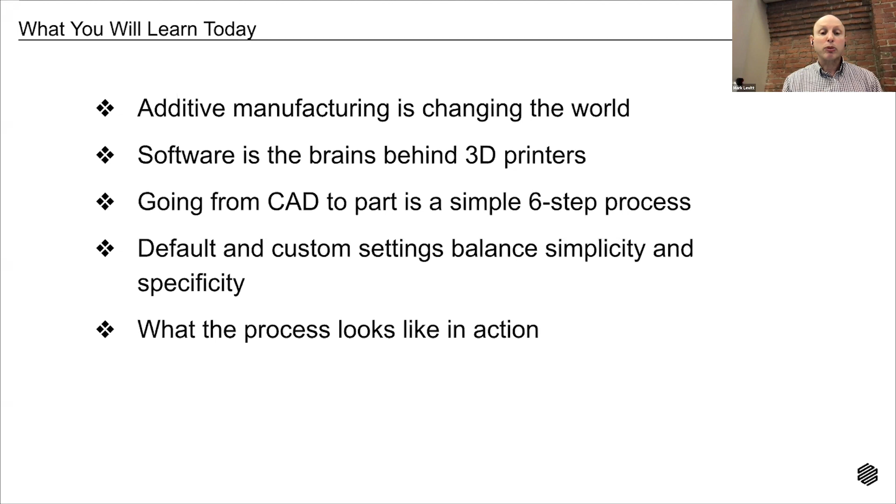In today's webinar, you will learn that additive manufacturing is changing the world. Software is the brains behind 3D printers. Going from CAD to part is a simple 6-step process. Default and custom settings balance simplicity and specificity, and what the process actually looks like in action. We have 3 members of the Markforged team here today to take you from art to part with Eiger.

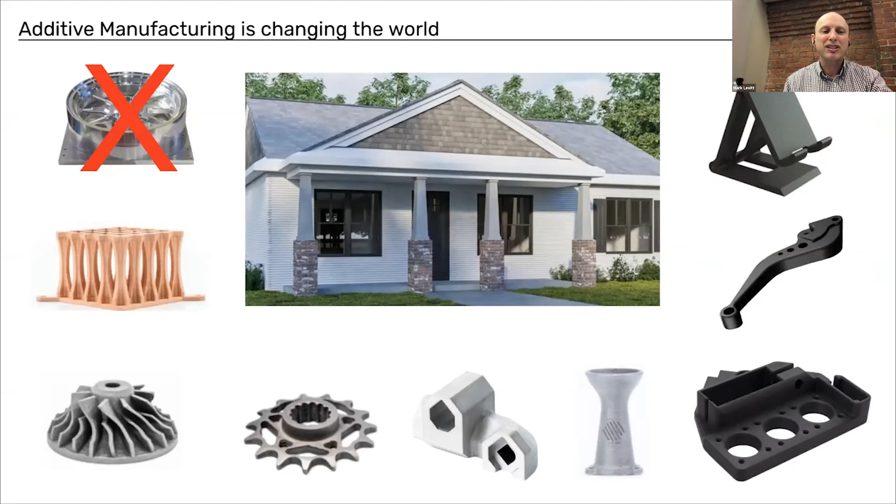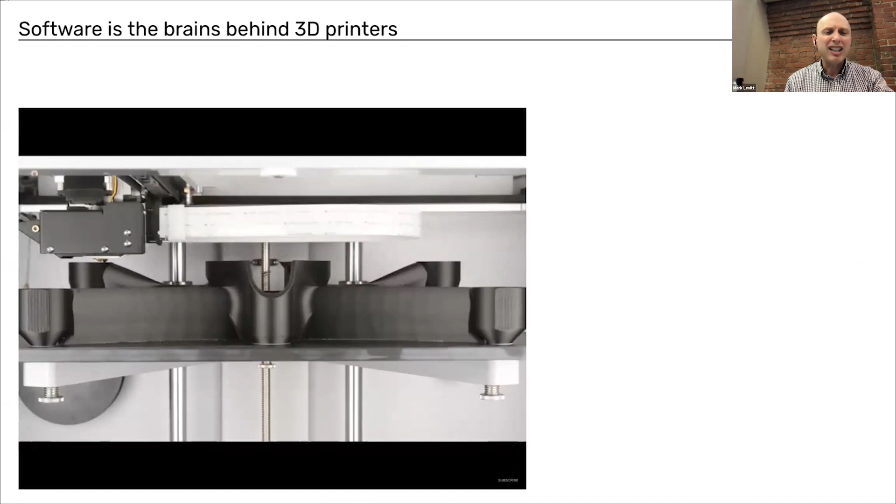Here's a time-lapse video of what 3D printing looks like for a drone unibody. The printer knows nothing about drones. It needs to be told what and how to print the part. Software is what we use to tell the printer everything it needs to know, including what part to print, how to print the part layer by layer, what materials to use, where to add supports if they're needed, what type of infill design to use if the part isn't being printed solid, where to add reinforcement if needed, what surface finish is needed, and how many parts to print at the same time.

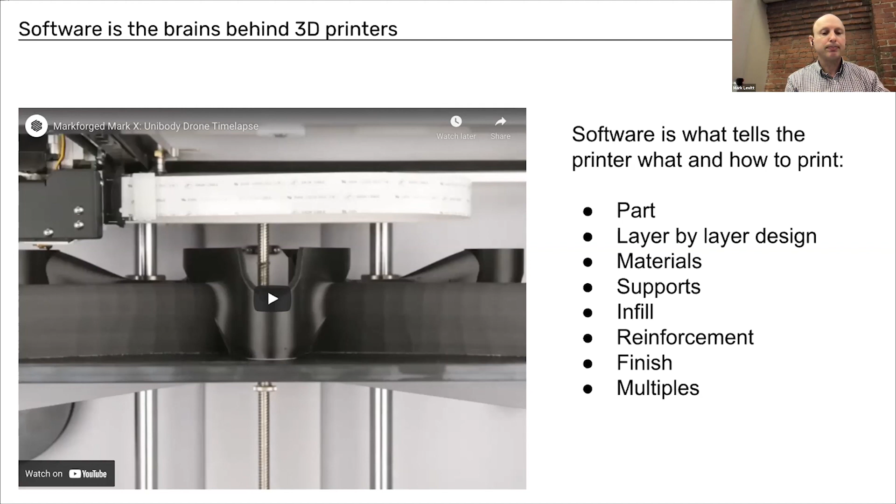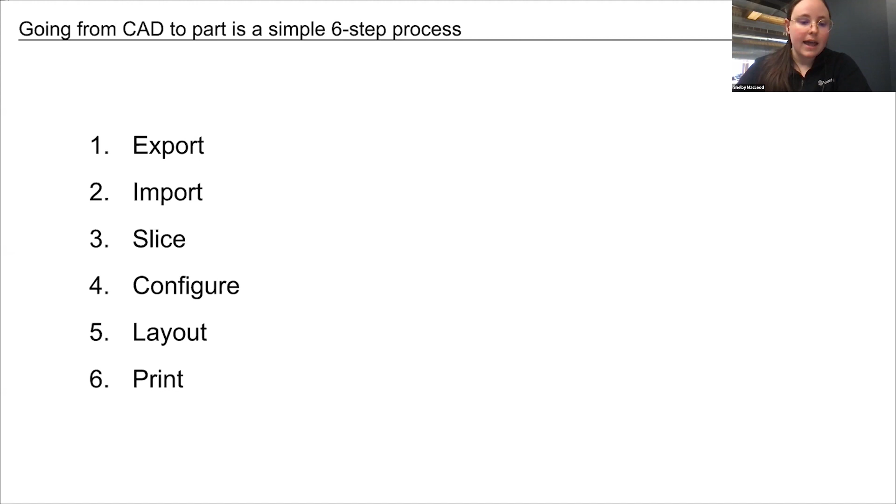Once you have a design for your part, going from CAD software to 3D printed part is a simple 6-step process. So first you export your part from your CAD software, then import it into Eiger, the Markforged software. Then you will slice it. So that is done again in Eiger, figuring out those paths layer by layer. Then you can configure any settings that you might want to change, and then lay out your parts on the print bed if you're creating multiple, and then print.

And how much time and effort you need to put into each of these steps will depend on what you decide about those settings. So if you decide to go with default settings, which are based off of what works for most parts, the 6-step process can be completed really quickly and easily in just a minute or two. If, based on the specific part you're printing, you decide that you need to customize the settings, then some of the steps will take some time, but may produce a better result for that specific part.

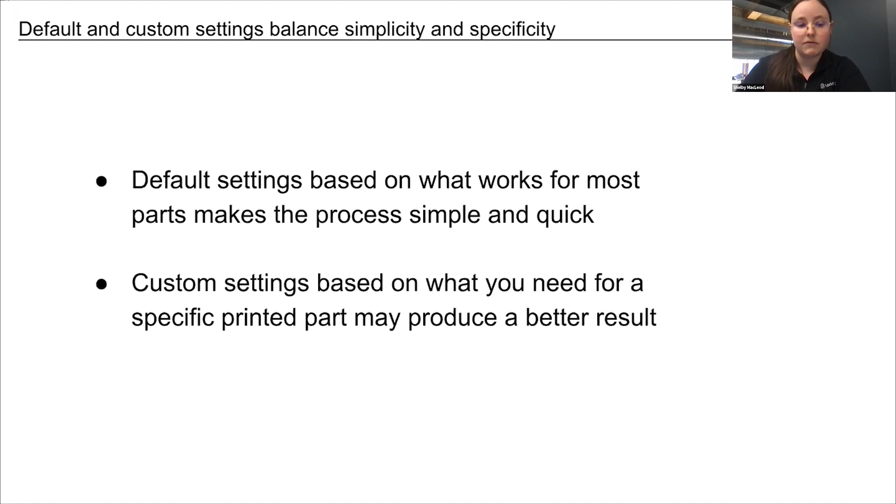Awesome. Thanks so much for that. Let's go ahead into the demonstration now of Eiger. Let me go ahead and share my screen here. Great. So what we're going to do today is take a look at exactly what Shelby just talked about, and that is how do we go from importing a part to slicing a part to printing a part with the Eiger software. Right now, what we're looking at is the library view of the software.

And in order to... Mark, if you could take back over again and show that picture of the demo part. I totally forgot. We need that demo part shown up here just so everyone has an idea of what we're talking about today. Sure, no problem.

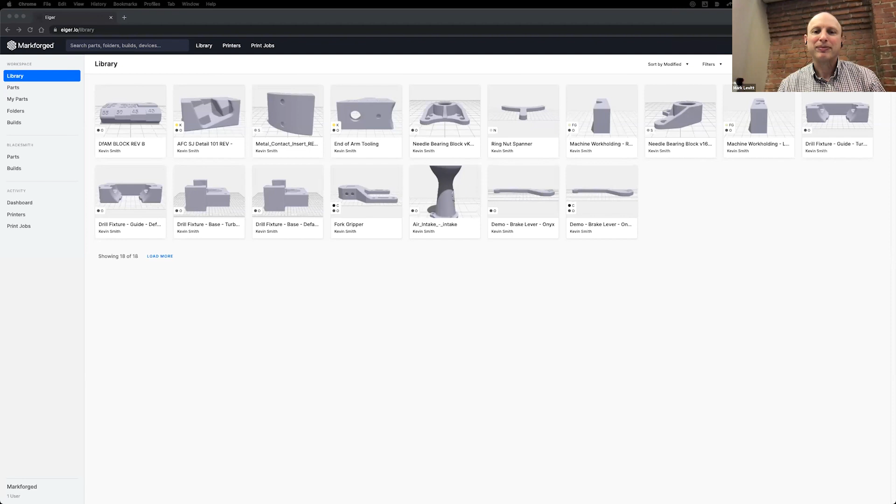Perfect. Thank you. I missed one step. Sorry about that.

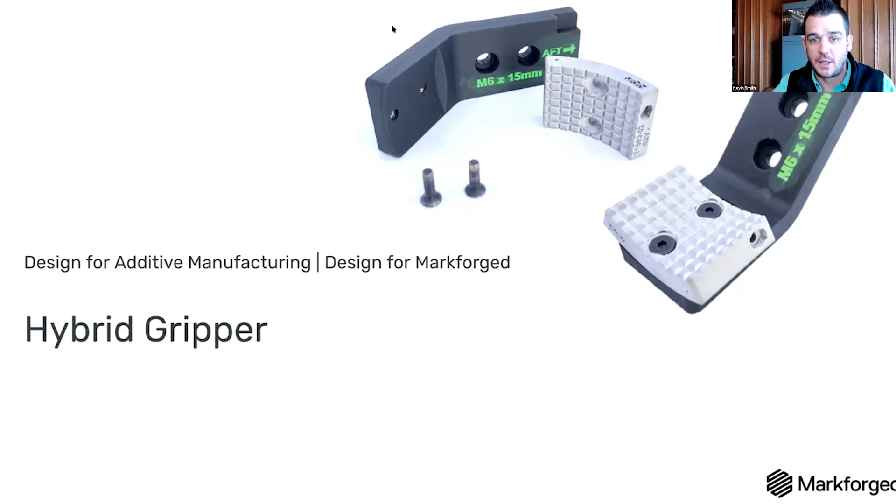And then it also needs to withstand some heat because the part that it's picking up is going to be hot, around 200 degrees Celsius. So as we move from one operation to the next, we want to make sure we have some heat resistance, another reason why you might want to put a metal piece at the end of your robot gripper. But we'll talk more about the robot gripper and some other functionality as we go through the demonstration. Let's head back over into Eiger. I'll share my screen again here.

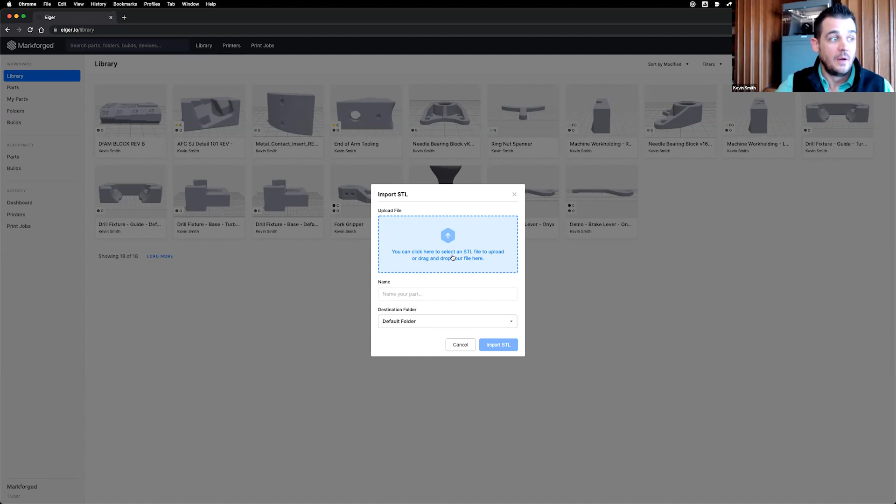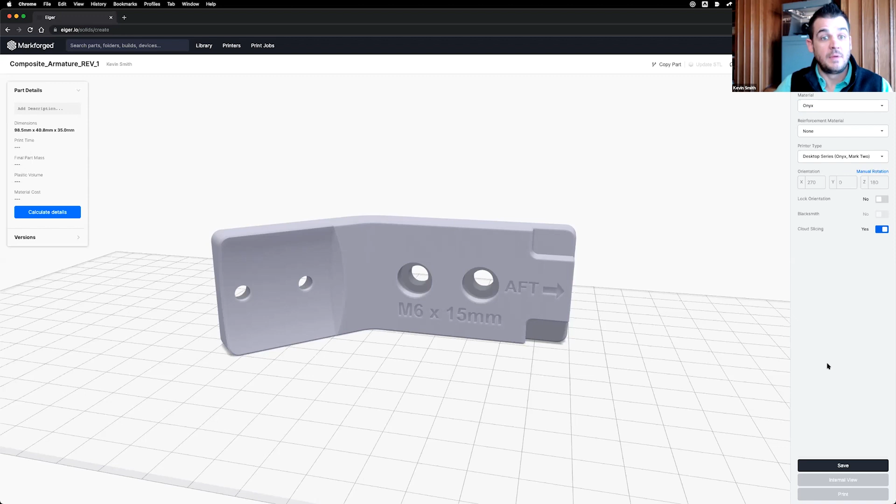Great. So I would like to say that Eiger could be as simple as 3 steps, and I think I can prove it out right now. Granted, we've saved out our STL file from our CAD software already. What we do is just go to import STL. We pick our part. We import it. Now, the one thing you might need to do here is set up the part so that it's on the build plate the way that you want it to print. Orientation matters in a lot of cases. We'll talk about this more in a moment. But bring in the part and then use the default settings. Don't touch anything. And we'll go ahead and hit save.

What's happening now is Eiger is sending information to the cloud. Eiger is a cloud-based software, but it still has a ton of security. We're ISO 27001 certified. Go to markforged.com or type in Markforged plus security, and you'll find a ton of information on how secure Markforged's platform really is.

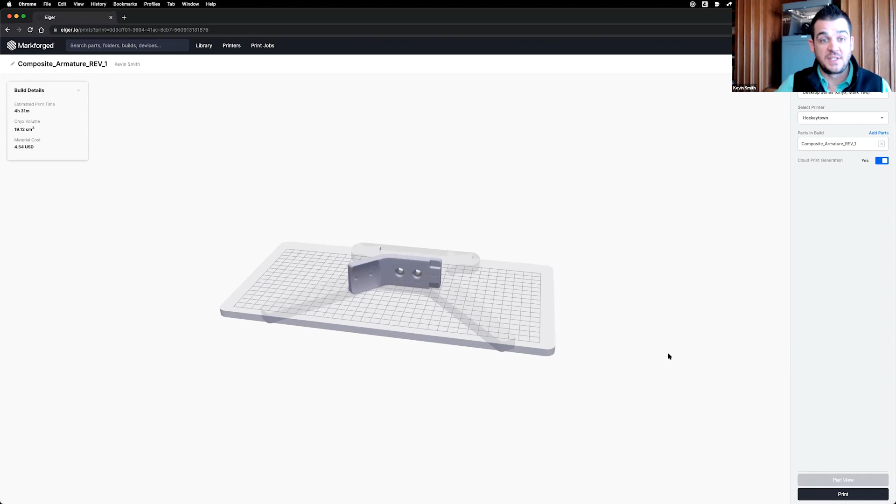Next, after we hit save, like Mark was saying earlier, it does all the tool pathing for the 3D printer, and we can directly go right into print. This is where Shelby was talking about putting the part on the print bed. We can actually see the part on the print bed. We can zoom out and get some great perspective on how big this part is and what it looks like on our actual 3D printer. And then we hit print. So I think that's 3 steps, but we could also make it more user configurable if we want to.

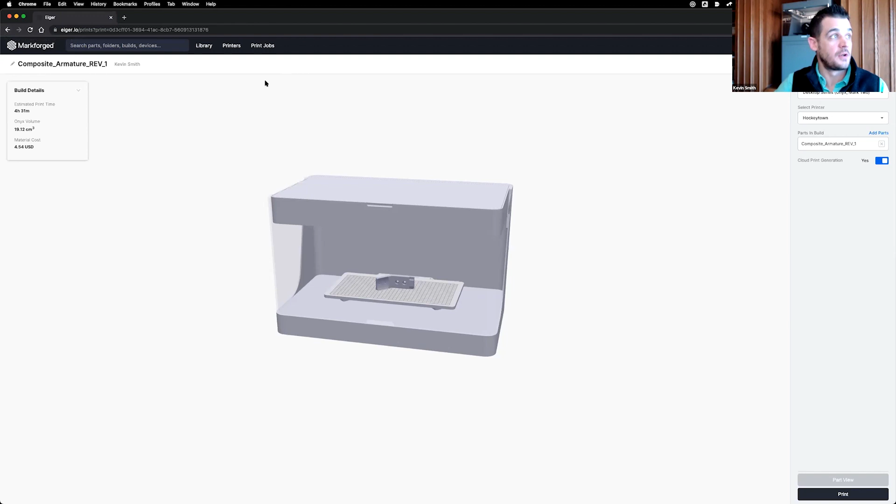So let's go back in time. We can either hit the back button on our browser because Eiger is a browser software. We run this from Google Chrome. You can backspace through everything that we just did there. It won't undo anything, so it's going to save your settings for this part. Or we can just go right back into library by clicking this button up here.

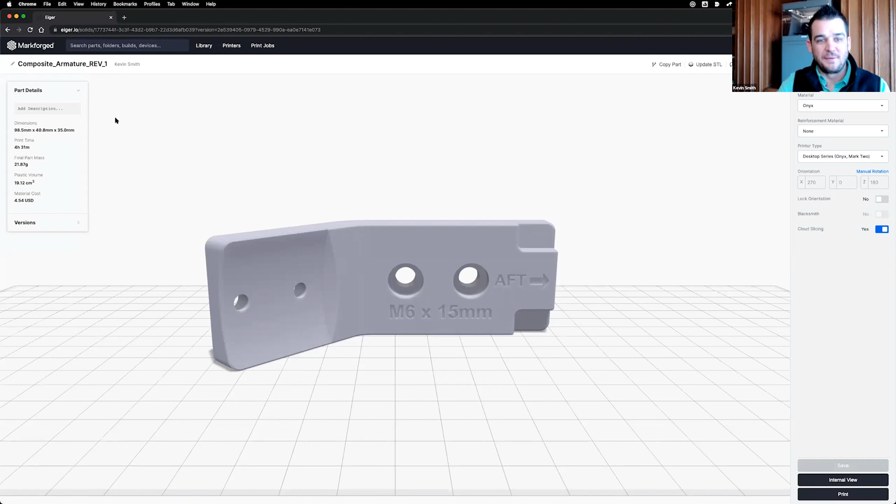Finding your part in your library. By the way, the library has different sections to it. We could create more folders and add parts to specific folders. Right now, we just have this set up as a basic default account to keep things simple. But we'll go back into that part, click on it, open it up. Everything is the way that it was before. Nothing's changed. But we might want to make some adjustments to this, so let's talk about that in a second.

But first, let's take a look at the left side of Eiger here. There is a part details window, and it's going to give you information like the size of the part, the time that it takes to print the part with your current settings, and then the part mass. Another thing to think about is the plastic volume. How much material are we actually going to use to print this part?

And then what is that going to end up costing us? If you want to do this right now, you can go to eiger.io and you can set up your own account and bring some of your own STL files into Eiger and start mathing things out. Like, what is it going to cost me to print this part? And figure that out right now if you wanted to.

So next, we'll go to the settings. Like we said, we can get more intricate with exactly how we're going to print this by using the settings that we have here. Let's take a look at the part settings tab over here on the right. Real basic here. We're going to keep it real simple. We have our material drop-down menu. This is where we can choose which material we're going to print with. We also have reinforcement material.

Markforged has a unique capability where we are able to add in fiber reinforcement to our parts. This is a secondary process, a secondary printed material that goes into the part. Carbon fiber, Kevlar, fiberglass. These will make your part super strong and keep it lightweight. So in this application today, we're talking about carbon fiber. Carbon fiber is a great reinforcement material to use when we're looking to replace aluminum or other metal parts with our 3D printed Onyx, our base material, and carbon fiber. So keep that in mind.

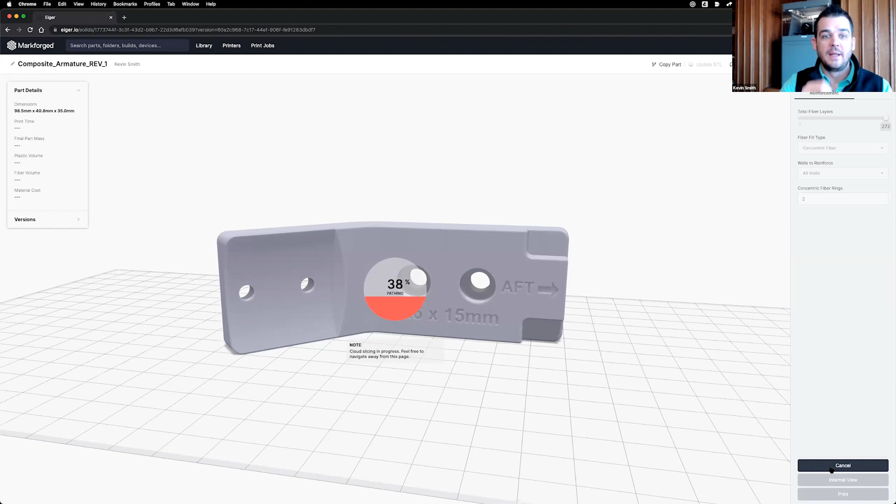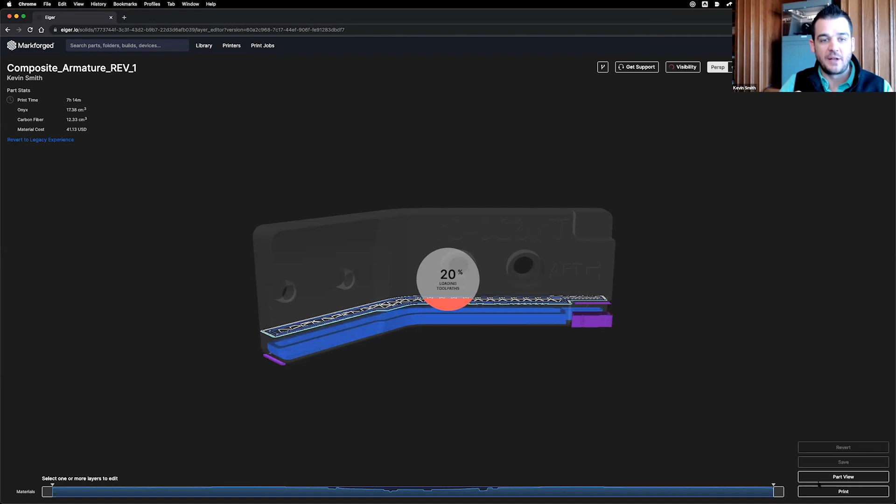Remember, we're adding in carbon fiber to give it the strength of aluminum, and we're going to go through the slicing process again. Once again, what's happening in the background here is the Markforged Eiger software is tool pathing the movement of the machine, where the material is going to get laid down. And now we're going to have some carbon fiber. Where do we see this? The internal view. The internal view is like an X-ray into the part. It shows us the internal process that's happening on the machine, how we build this part up.

We can see our supports. We can see our internal triangular infill or solid infill. Keep in mind, with 3D printing, we can lightweight things. It's not like a plastic injection mold. When you inject the material, it fills up the entire mold and you have a solid part. We can print solid if we want to, but we can also go with the triangular infill, which will lightweight the part further. So what we're seeing on screen right now is a lot of blue. That's the carbon fiber. That's the color we've chosen for carbon fiber with the Markforged Eiger software, and purple, the supports.

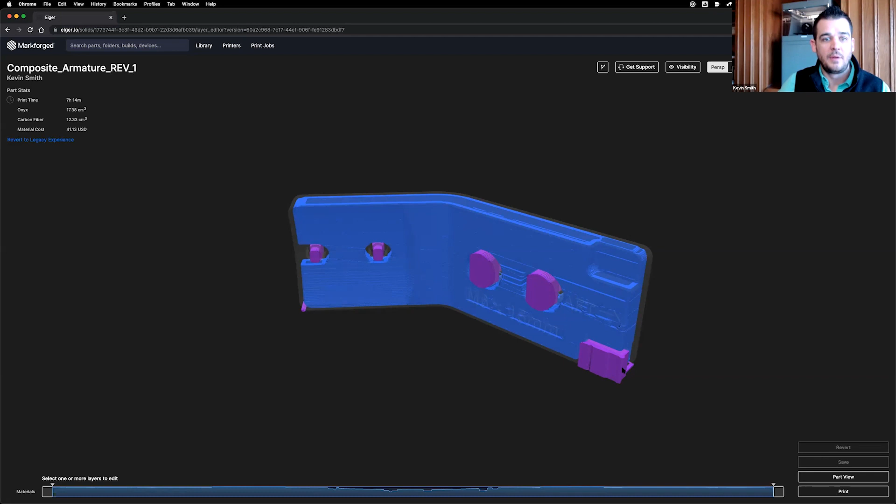We can go through and take a look at this in the 2D view, once again, in an X-ray view, see exactly what's happening on each layer, and just verify things are gonna work the way that we want them to work. We have the fiber in the right place. And we could literally go through and change every single layer of fiber if we wanted to by using these options up here on the right.

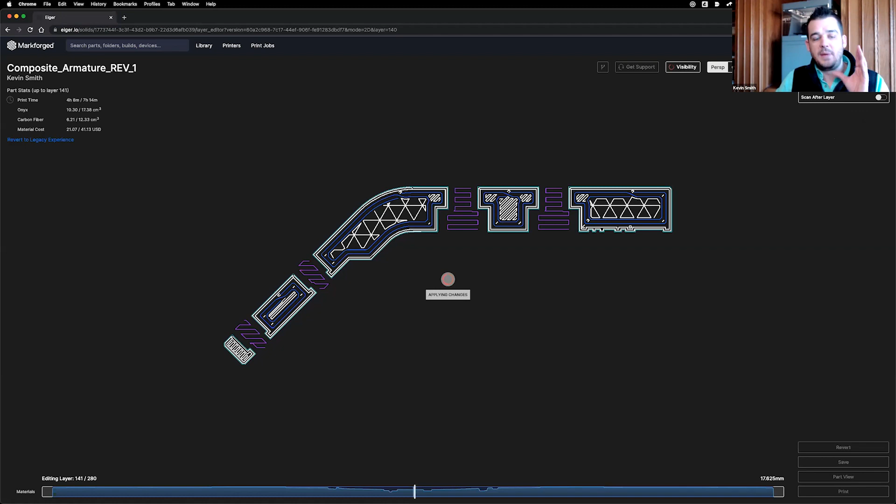I'm not gonna get into that right now because this is a whole separate subject and we have Markforged University for that. If you want to understand a little bit more about what fibers to use, when to use them, and how to use them, take a look at Markforged University.

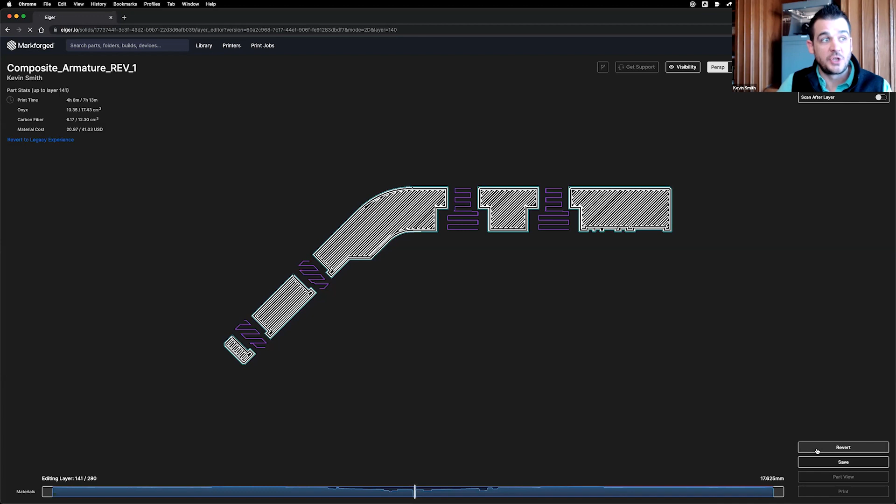It will give you some great tips on that and a great learning experience as well. So I'm going to go ahead and revert the changes I just made here. I'm not going to save those changes. And then we're going to go into the build view. Once again, click print, takes us to the build view, and we've got our part in our 3D printer ready to go.

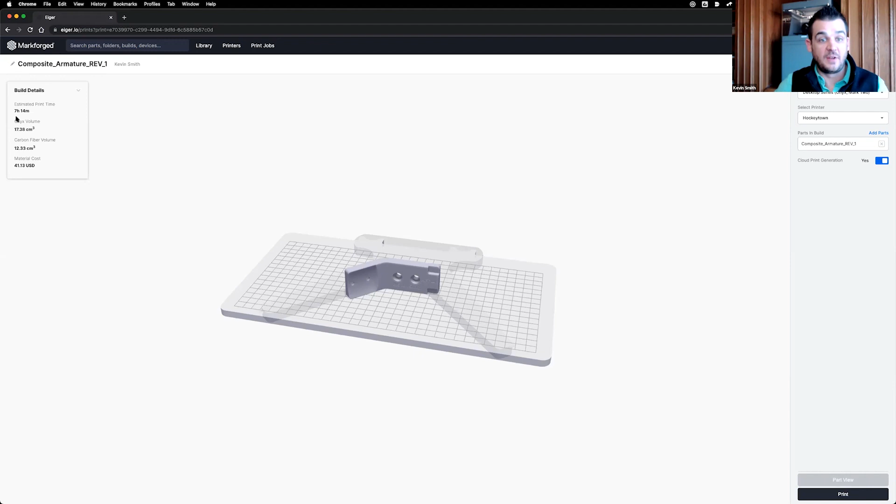On the upper left side here, this is the build details. Why does it look kind of the same as the beginning, but a little different? It's because this is what we call a build in Eiger. We can add in more parts. So if I wanted to make 3 gripper fingers, most of the time, your robotic end of arm tooling is not just 1 finger. You might need 2, you might need 3.

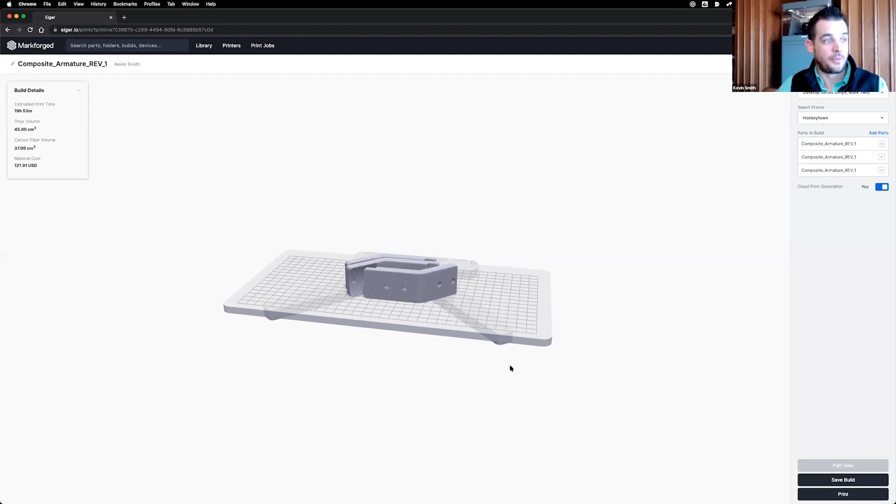We can go ahead and add in more parts using the add parts option over here on the right. Now we've got 3. Notice they automatically nested on here, so they're in the perfect position to hit print. We can go ahead and hit print now. It's going to take you to your option to print, and it's going to tell you, hey, this is the plastic volume, this is the fiber volume, this is how long it's going to take to print this. Do you want to print it now, or do you want to send it to your print queue?

So that's composites. We started with just a simple 3-step process, boom, boom, boom, or we got way more intricate by adding in carbon fiber, seeing how it's routed in the part. We could have changed some things there, and then we added multiple parts to our build plate. So we've changed some things with that last example there.

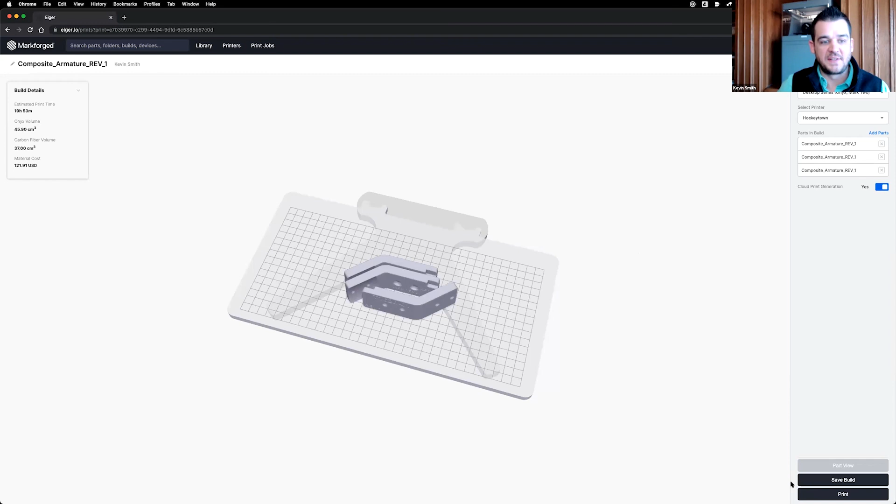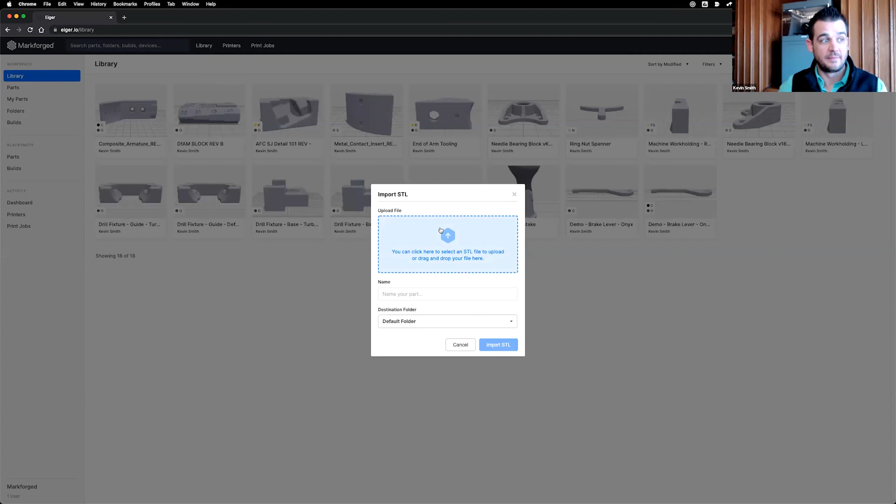What I'd like to do is go through one more example with you. Let's take a look at the little gripper piece of this end of arm tooling, which is that metal piece. Let's take a look at this whole process one more time. Import STL. We're going to select our metal contact piece. Import that into Eiger. This is where we're going to set up how we want to print the part.

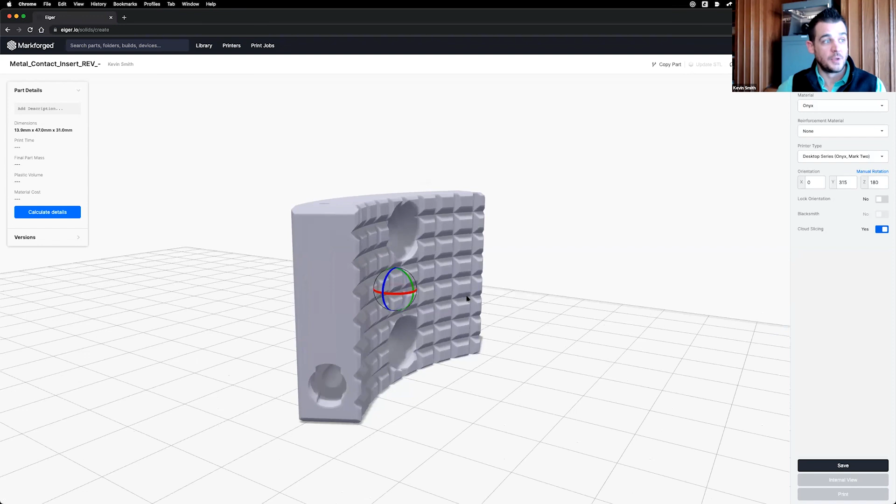We're going to select this bottom face right here. We could use the manual rotation option to rotate this around, however we want to rotate it. Then remember, we're working with metal now. What's going to change? Our material type. So we'll go up here to the material drop down and we'll select 17-4 stainless steel. You can see all the other options of materials that we have here too.

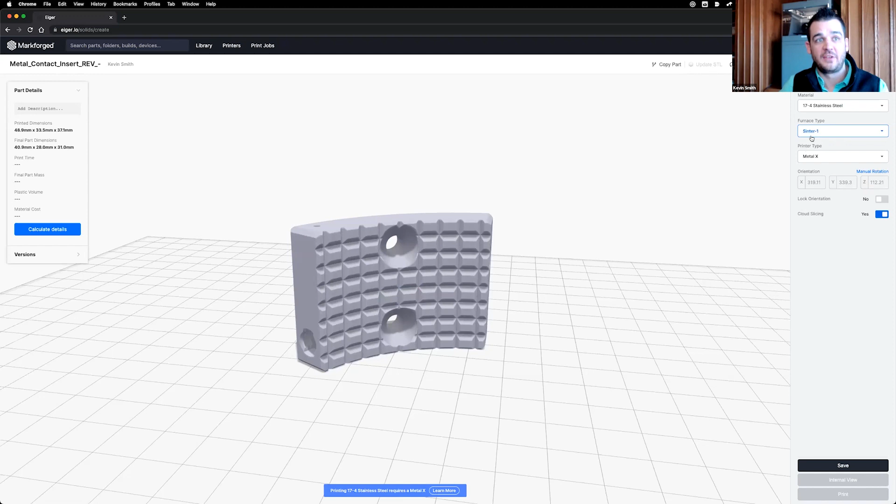17-4, it automatically chooses a furnace and a printer type based on the material that we chose. The Metal X system is a 3-part system: printer, wash, sinter. Something to look into if you're interested in printing metal. We won't get into all the details of that right now.

Notice we're also getting some messages down here at the bottom of the screen, and you'll see this too if you load up an Eiger instance and try to run through some metal parts. It's just letting you know that, hey, you don't have a Metal X system in your organization, which I'll show you our organization here in a second. But if you did, you would have that option to print with.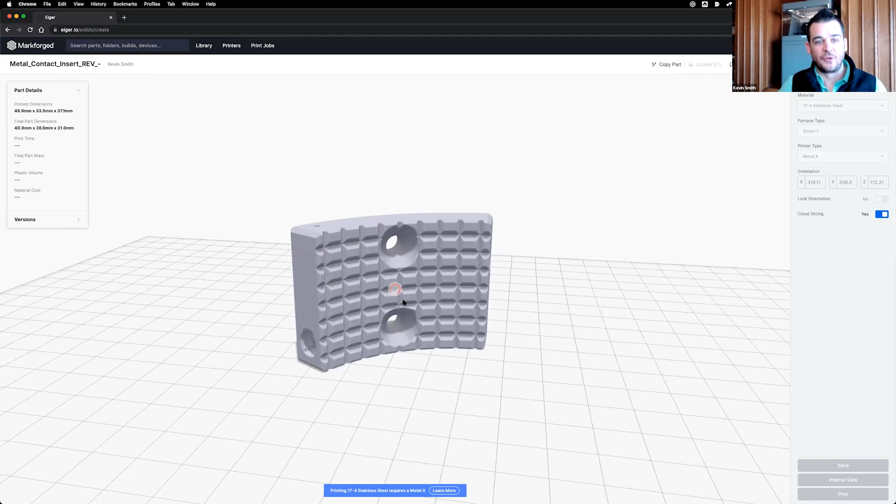We'll go ahead and just run through the calculation of this part with our default settings. And we'll take a look at the part details. They're going to look a little different this time because now we're looking at a metal part versus a composite part.

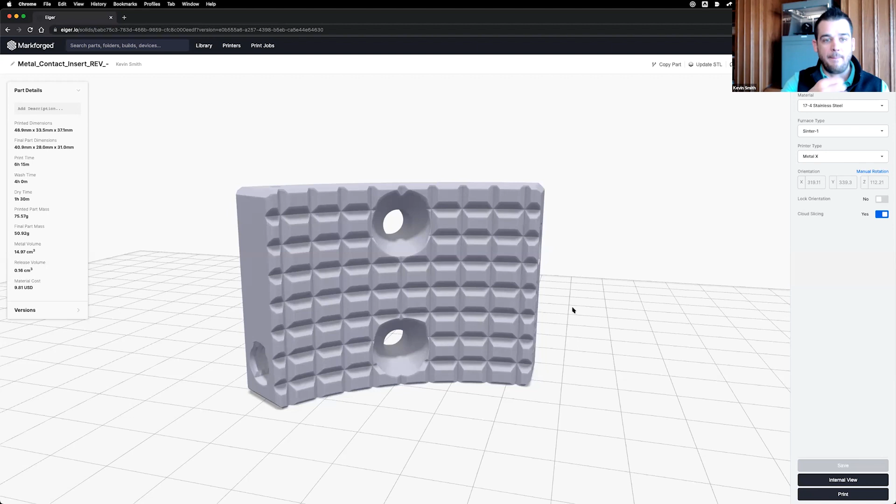I did want to talk about something else when we look at this part, and that is this pattern on this piece. It's a knurling pattern that was designed in. The nice thing about 3D printing is complexity is free. It may take a little more design time, but think about CNC machining this part. It's going to be a lot different of a beast, right? A bigger animal to handle printing all these in here.

You might have to use a V-bit tool to get it in this curved shape in the first place. You're going to have to remove a lot of stock from the CNC machine. We also have some internal channels in this piece too. So 3D printing allows you to add complexity to your part without any added cost.

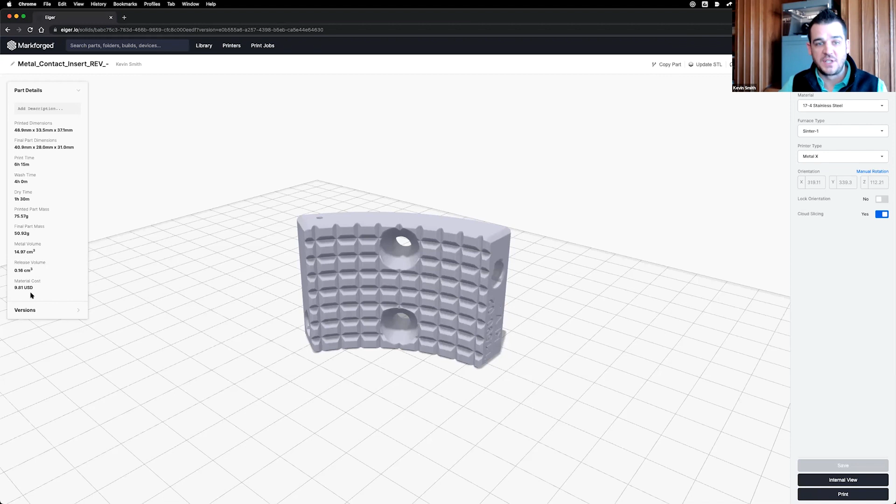Let's move over to the part details. It gives us the print time, wash time, dry time. Once again, this is a 3-part process. We print, wash, sinter. And then we also have our metal volume and how much it's going to cost to produce this using the 17-4 stainless steel material.

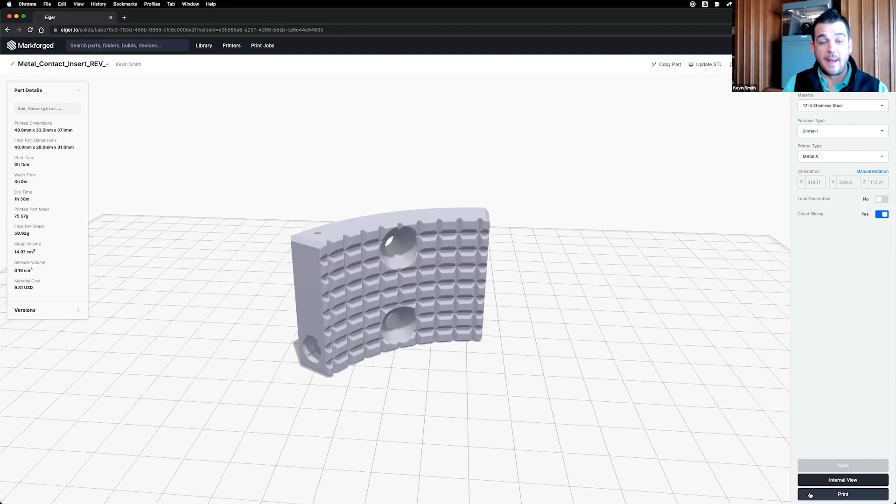Next, let's go to that print view one more time. Remember, this is the build view within the Eiger software. It's going to show us our MetalX build plate. And if we zoom out, we can get a perspective where we can see the actual entire MetalX system on screen. And over up here on the right corner is where we can see our printer type.

You can see MetalX is grayed out right now because we don't have a MetalX within this organization for this demo of Eiger. But we have our estimated print time, stainless steel volume of material, and then the material cost. And if we wanted to, we could add in more parts here, and we could print 3 of these if we needed to, just like we were with the composite parts.

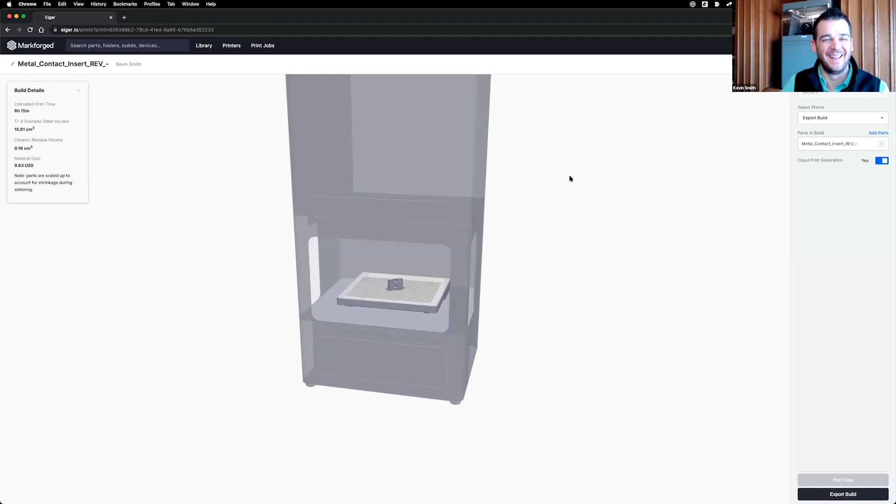Or we could export the build too. If we wanted to send it to somebody that we knew had a MetalX system, we could do that. Yeah, so like Mark said, any questions so far? I know we've covered a lot right now. Yeah, we can go further here, or we can answer some questions.

And I know that one common question is, the cloud is great, and for some of our parts, we can use the cloud. What if I need to work completely offline? Is that an option? And in fact, I would say a minority of our customers do use our offline Eiger software, which is 100% offline, which does not require any internet connection from the computers or the users that are accessing the part storage, the slicing, and the printing.

And they can directly print via USB or using our LAN connector capability to connected printers on their private local area network. So we definitely have an offline capability. Most of our customers see the power of the cloud to be able to be connecting to any of their printers anywhere in the world, wirelessly, over the internet.

And the system that we have is a self-learning system with over-the-air updates, which is informed by anonymous data that we can gather in the cloud to make sure that prints are successful, and we can tweak and adjust things. And we've been doing that for over 8 years now.

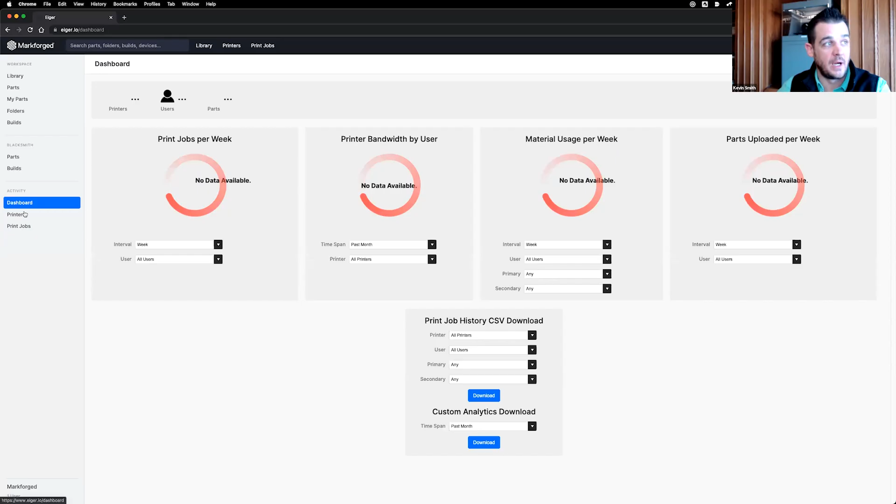The nice thing about the dashboard is it's going to give you insight into what your users are doing within your organization, how much material they're printing, how many printers you have, which ones are up, which ones are down. These are the kind of things that are in the free version of Eiger that you can access from the cloud right now. So very intelligent.

The other thing is too, once again, it's cloud-based, it's internet-based. So you want to kick off a print from your house, great. You want to kick off a print on a printer that's across the globe, go for it. You've got those options there. So, as far as the way that Eiger works, it's a management software as well. And like Mark was saying, we can build on this.

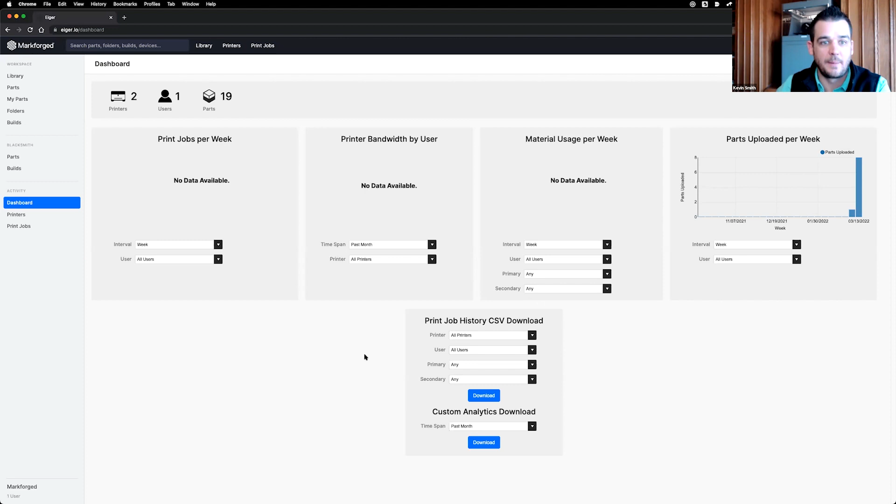We have the way to scale up Eiger to more of a global fleet management system. And the dashboards is one piece of this, but it gets bigger as you grow as an organization. So 3D printing can become a very powerful tool for you globally.

I see a question in the Q&A here asking how you would obtain the material. Is it supplied by Markforged? So I can say yes. We produce all of our materials and build our software and our printers. And so something that's really great about that ecosystem is when you're buying Markforged, you're not buying just a printer, you're buying the whole digital forge, which includes all three of those things.

And that's actually part of what makes us be able to have such an easy, seamless process in Eiger that Kevin just demoed for us, because we have control over our printers, we have control over the materials. We can make those settings so that you don't have to fiddle with a bunch of different settings. We know what's going to print best on our printers. And so we just give you control where it's most meaningful to you, and we take care of the rest to make sure you get great quality prints.

And we are continuously releasing new materials. So just this week, we released what we call Precise PLA in multicolors. Most of our prints have historically been in black with Onyx as the base nylon material. We've had a nylon white as well, but it's been primarily black for industrial commercial purposes. But we have introduced Precise PLA in lots of different colors for prototyping and other uses.

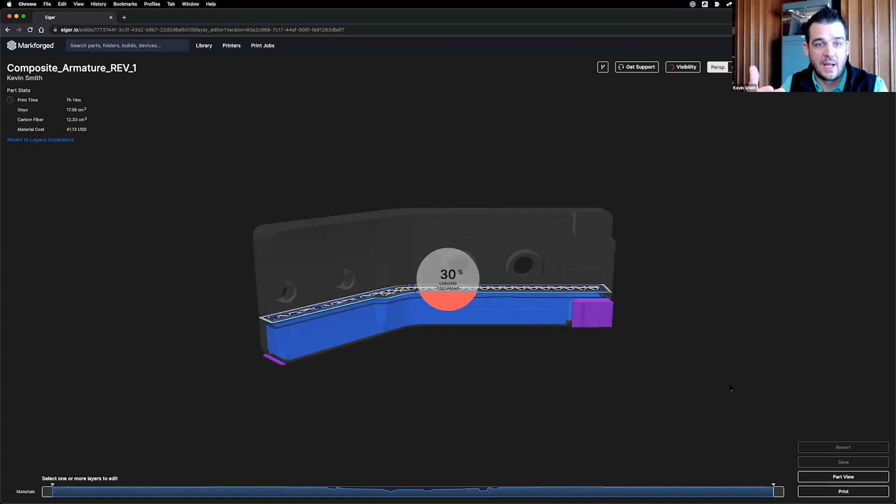One question also has come up, Kevin, is can you pause a print for various reasons to bring in some tweaks? I know some people like to insert magnets or something in the inside of the print. Can you describe that process? Yeah, absolutely. So we would go into our internal view of our part, and we have some options in there where we can add in pauses for inserting hardware like magnets or maybe nuts that will be an attachment point for an assembly of parts.

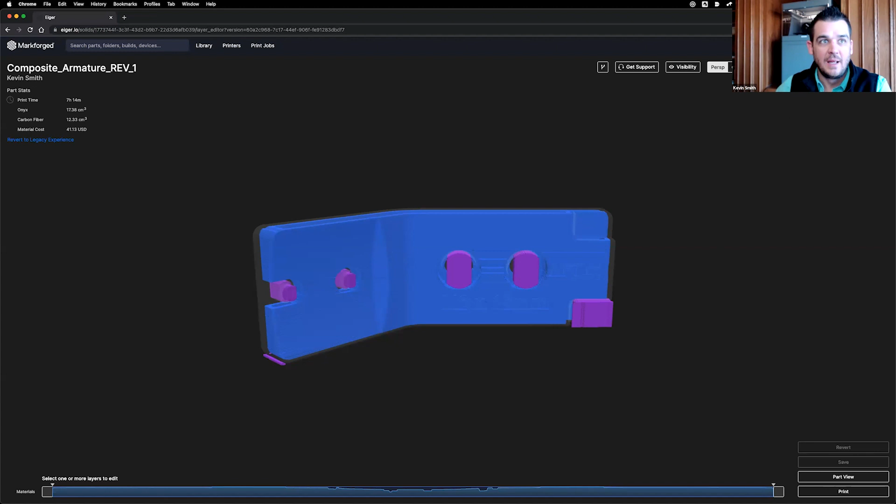I like to give just a little bit of information at a time, because 3D printing really is a big animal. It takes on a whole new, creative mindset when you get into 3D printing. But yeah, a lot of our customers are doing some pretty intricate stuff with this. So if I wanted to add in a pause, I could select any layer in the internal view here and just choose this option, pause after a layer.

And what's going to happen is it will pause the machine. And whenever something happens on the Markforged equipment, it's going to send you an email notifying you that your print is paused. And then you can walk over there, drop in your nut or drop in your magnet, whatever it is that you're placing into the part there. Yeah, that's how you would do that, Mark.

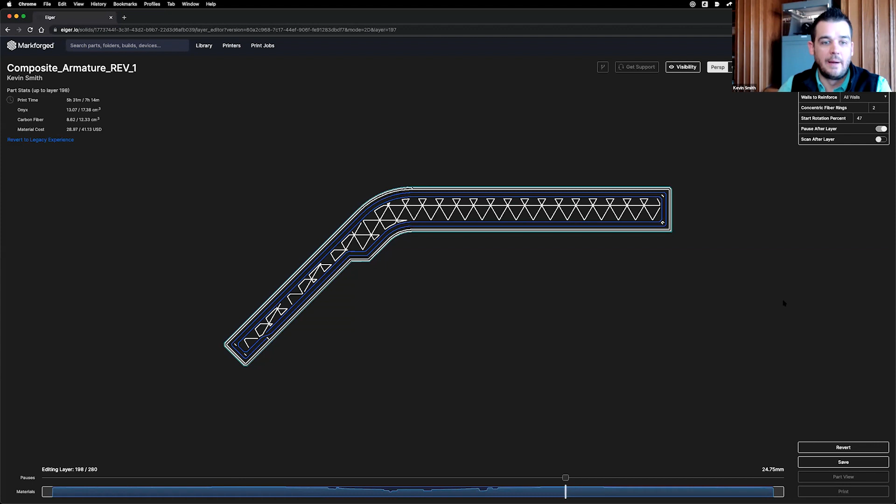Great question. Another question is, do we have the option to design a part from scratch, I assume within the Eiger software? And related to that, can we manipulate the size of the part? And can we produce our own parts? Could you kind of describe the interaction between CAD software versus Eiger and what changes you can make around size and other things within Eiger? Absolutely.

Right. So the CAD side of things is a separate entity. So whatever CAD software you're using, we stay agnostic to that. And all you'll be doing is using your CAD software to design something, save out an STL file. And that's what we were doing at the beginning in the library view, we brought in an STL file. So CAD's separate. What can we do as far as part size goes here?

We do have an option in our settings where we can use this scale function. We can scale the part up or down. If for some reason you got the part in imperial units versus metric units, you can change the units here as well. So those are a couple different options we have there. And I didn't want to go through all of the options because there are quite a few options for being such a simplistic software. You can get really into the weeds there for sure if you need to.

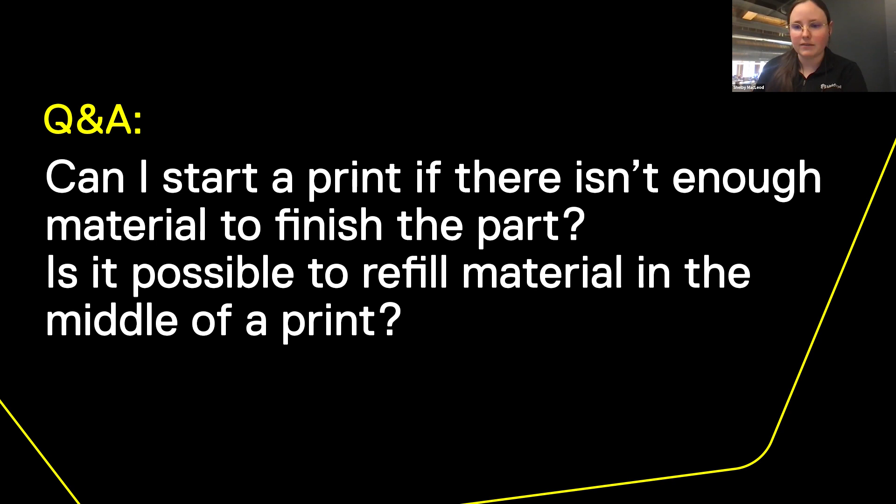And you could even put in a pause if you anticipate you're going to need to replace the spool. You can set a pause prior to that point, and then it'll stop, and you can go in and do that. So you can do it either in a planned way or an automated way.

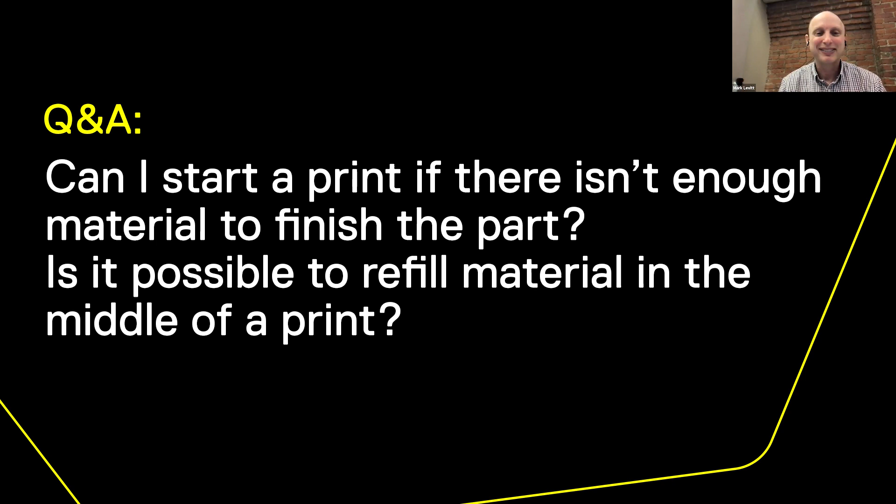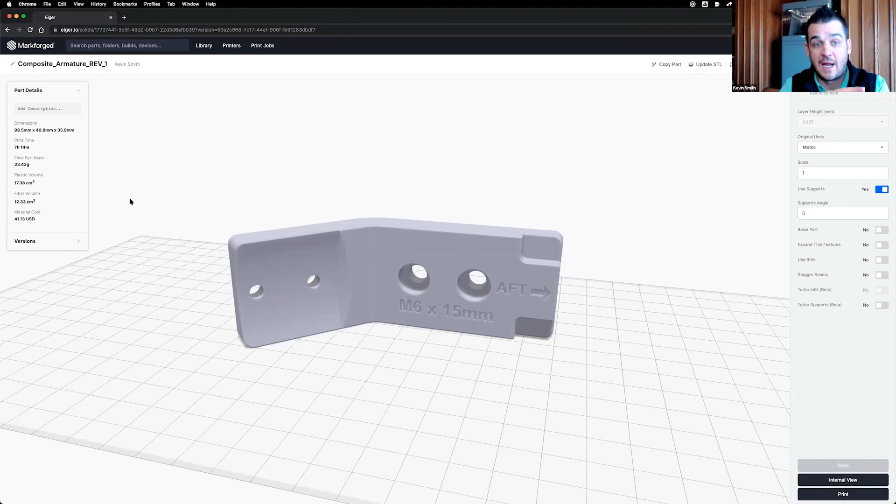We'd bring it into Eiger and slice it, make sure that we got the part size just right, because you want to be there when you're changing over a spool of material. In most cases, that's what people are looking for. But this size part here, this is small enough where you could fit a lot on the build plate before you're going to go through a spool of material.

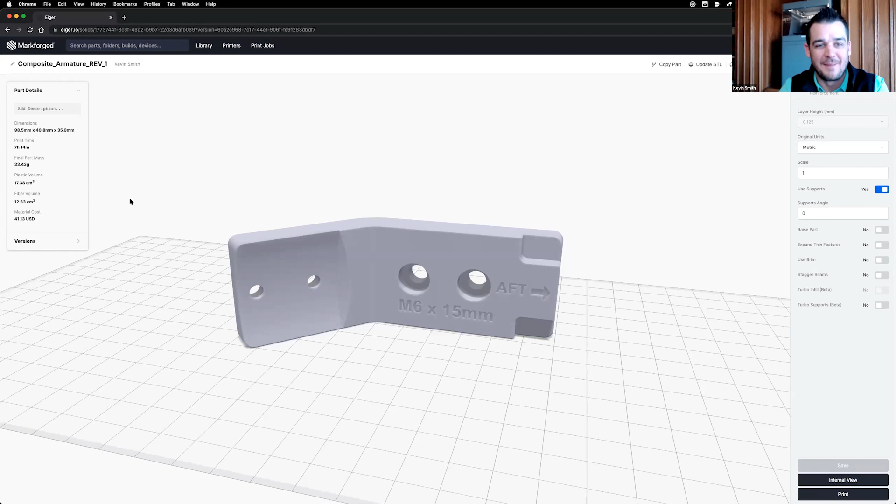So a little different. You've showed using Eiger for both composite parts with and without fiber reinforcement, as well as a metal part. So obviously the software can handle both. The question is, does Markforged have a printer that can print both metal and composites today?

Well, currently that's not in our offering. Correct. Yeah, we have the separate Metal X system. We have desktop and industrial composite printers. And currently, if customers need both of those materials, then they need both types of printers. We do have partners in our channel that act as service bureaus. So if you're primarily printing in composite and you occasionally need a metal part, you could rely on a partner to print those metal parts for you, or vice versa.

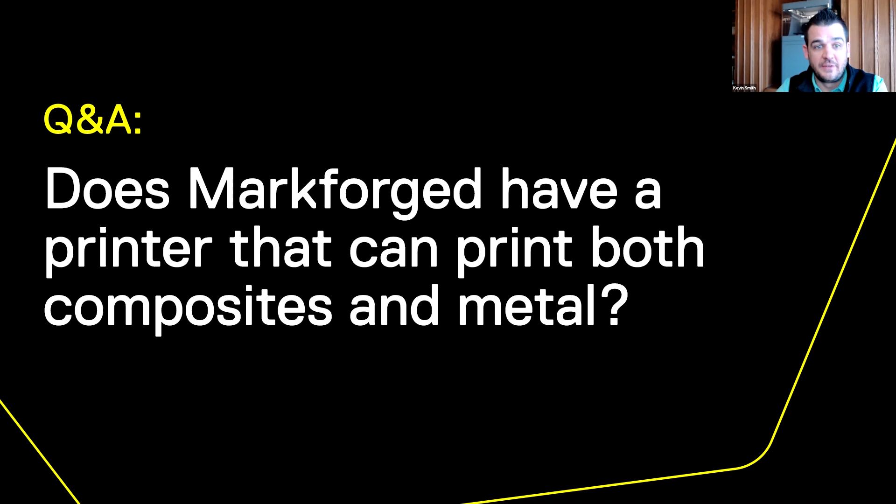Absolutely. And one thing to touch on with the metal is the triangular infill. It's super important to understand that when we're printing 3D, we're usually running with triangular infill. You can print solid with metal if you wanted to. You could print solid with composite, but if you're trying to impact your weight on the end of arm tooling, then print that metal piece with triangular infill and reduce the weight of that part. It's very impactful.

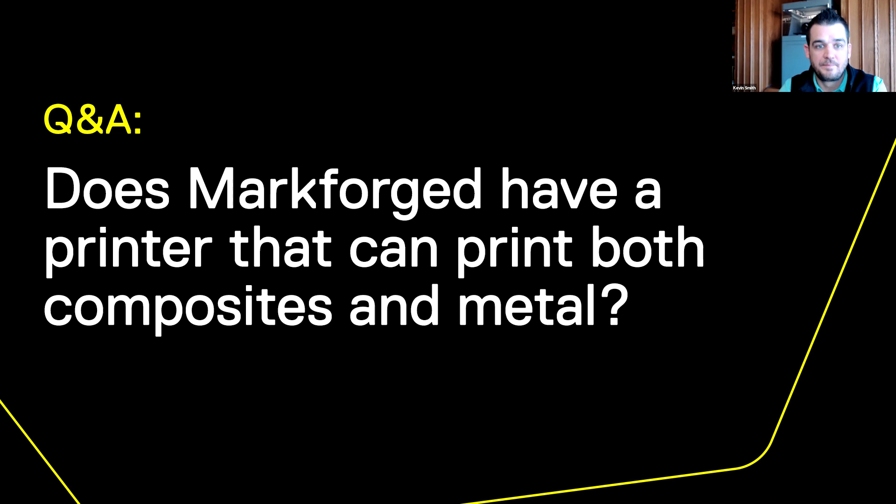There's a question about, can you elaborate on the accuracy and quality of the printed and sintered surface finish for metal parts? If you want a higher quality finish, does it need to be CNC machined and polished by hand, or what do some of our customers do to post process their metal parts?

Yeah, as far as the metal finish on our parts goes, we refer to that metal part as a cast-like part. So just like you would see in your normal 3D printed parts, depending on the layer height you choose, you would potentially see some of the layer height ridges, or cusps, as some people refer to them. But that's a minor thing, especially when we're talking about a case like this.

Now, if you need a surface finish like a CNC machined part, you can CNC machine these parts afterwards. That is an option. We could also adjust the thickness of the walls or the shell of the part to enable you to have that stock that you need to remove for the CNC machining process. But a lot of our customers are CNC machining these parts on the faces they need to, or they may be drilling, tapping, reaming, things like that to clean up surfaces. But yeah, the part will come out in more of a cast dimensional shape.

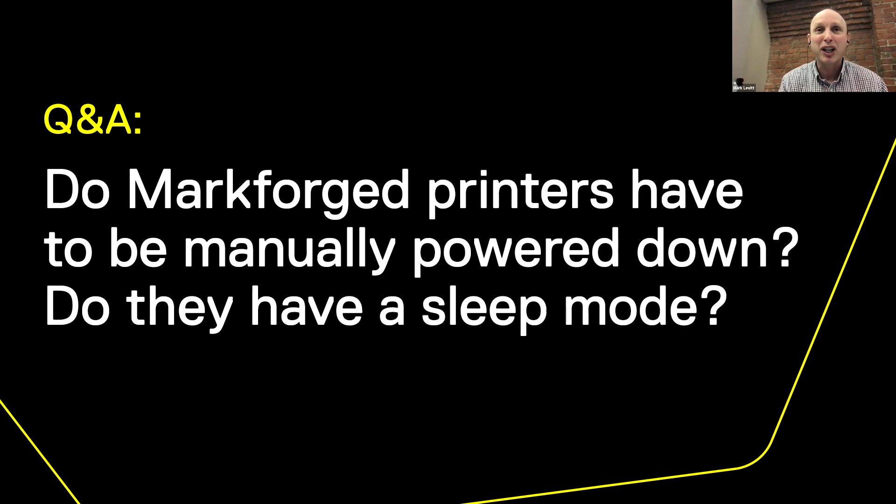Question about our printers themselves. Do they go to sleep by themselves? Do you need to power them down? Most of our printers are on 24/7, and they are low energy consumption. Kevin, do you see or hear your printer kind of going to sleep mode if you're not using it? We don't have a sleep mode for it per se, but the temperatures, all that adjusts automatically.

So once the part's done printing, the heat goes off, gets cooled down by some fans on there. So really when it's heating and building is going to be when it's consuming the most energy, but it's extremely low energy. If you wanted to reach out to us, we can give you actual energy ratings on our machines, how much energy they'll actually take to run. And in idle mode, it's ridiculously low. The X7 and the desktop units, even the Metal X printer just plugs into the wall. So it's that lightweight on energy.

We did have a question about supports, and we talked about how you can either turn them on or off. When you turn them on, it's for basically the entire part. We have been exploring or planning to support the ability to be more selective about where in your part to have support. So definitely keep an eye on markforged.com for updates on that.

I see a question here about overall print time. So the gripper part, Kevin, you were showing being 7 hours. What were the times for the post-process, so the wash and sinter? If you could pull that up. Yeah. 1 second here. I can reshare my screen.

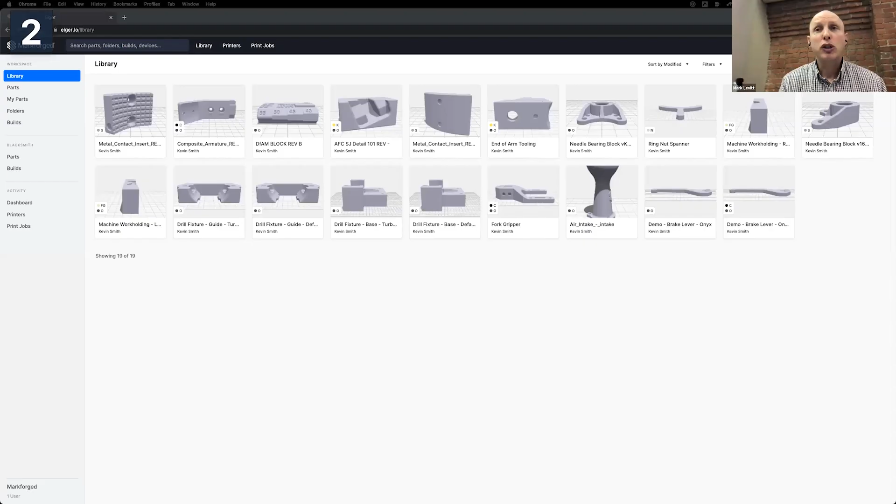As you're doing that, we did introduce a next day metal capability. So depending on the part, you can have a part that starts printing today and it'll be fully done, ready for use, by tomorrow. I think it's a 28-hour time span. So we're not talking days or weeks. We're talking typically within the next day, depending on the build volume and the complexity. Yeah, absolutely. And that's due to some special configurations that we've created.

The nice thing about the Metal X system, well, any Markforged hardware, is it keeps getting smarter. Like Mark was saying earlier, we have over-the-air updates. That's a huge benefit to having a cloud platform, it literally gets smarter overnight. These aren't going to get outdated and start collecting dust. And you don't need to call us to come and implement a new material or things like that.

The Metal X system started in 2018. Now it's 2022. We are 2 times faster printing our materials than we were in 2018. And that was all just over-the-air updates. We do a lot of hardware engineering, material engineering and software engineering behind the scenes. And that's what makes it really special.

So as far as the print time goes, we've got 6 hours and 15 minutes here. Wash time is 4 hours. Dry time is 1.5 hours. And then the sintering depends on the sinter unit itself, because we have 2 sinters, sinter 1, sinter 2, and whether we're doing the express run, which is 17 hours. It can be anywhere from 17 hours to, I think, 27 hours is the longest run we have.

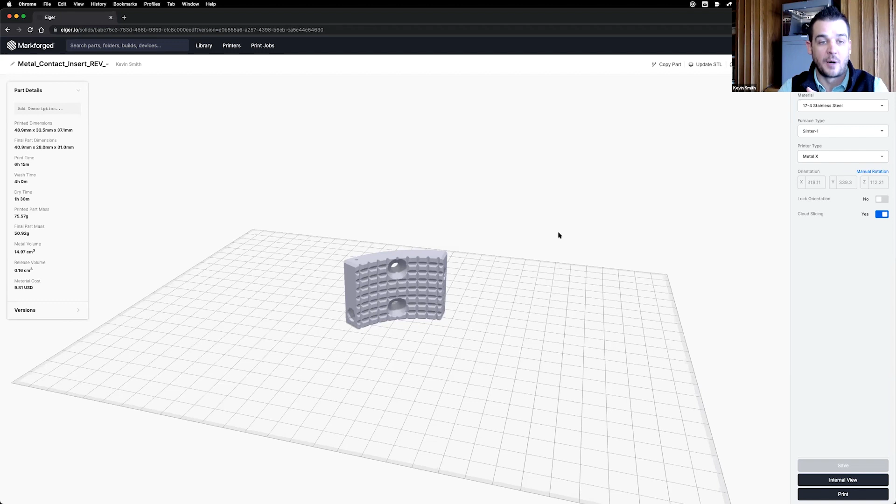Great. But that's just one part on the screen right now. Printing is a 1-to-1 application, meaning it's going to take 5 times as long to print 5 of these as it would 1. The wash station is a batch process. So washing 5 of these is going to take 4 hours, not 20 hours. Sintering 5 of these is going to take whatever that sinter time is. We're not getting exponentially larger based on the number of parts, only on the printing system. Hope that helps.